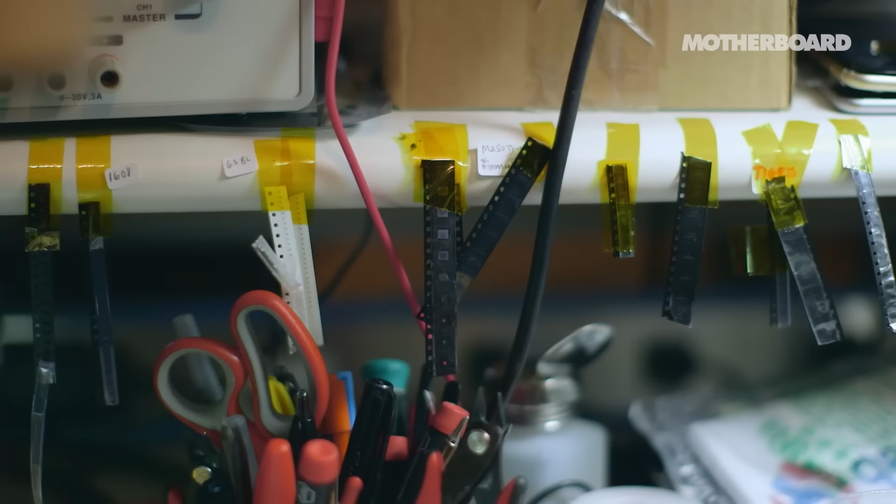Electrical engineers are some of the heroes within the ongoing revolution in mobile devices like smartphones and watches. While much attention has been focused on the user-facing design of smartphones and other contemporary electronics, the internal functioning of these devices is just as important to their ultimate acceptance by organizations and individuals. For instance, their CPUs, networking capabilities, and batteries dictate their look and feel, and all of these components are the work of electrical engineers.

Let's take a look at all of the most recent iPhone designs, the 12, 11, and the X. One of the biggest storylines about these handsets is the distinctive notch, a black bar intruding into an otherwise edge-to-edge OLED screen. Opinions differed on the elegance of its appearance, but its placement was ultimately determined by engineering constraints.

Apple's electrical engineers had to fit many advanced electronics into that notch, including a dot projector, flood illuminator, proximity sensor, and infrared camera. These features work in tandem with the phone's front-facing camera to support the Face ID authentication system, which is an alternative to signing in with a passcode. Due to the total size of all the hardware required for accurately scanning someone's face, the notch reached down into the top center of the OLED display.

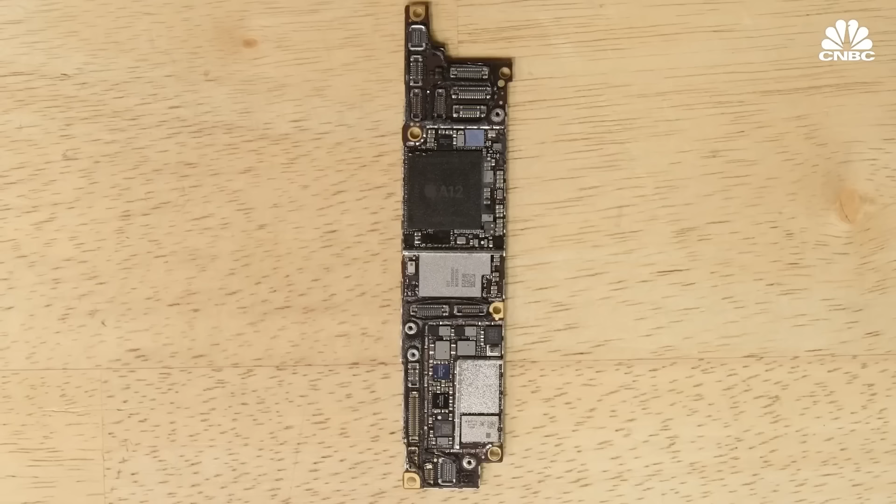High-profile mobile tech like the iPhone is hardly the only domain for electrical engineers working in this category, but it is the highest paying and fastest growing. In each of these fields, electrical engineers operate largely out of the public eye to ensure the efficiency, safety, and cost effectiveness of the numerous essential systems underpinning today's hottest technologies.

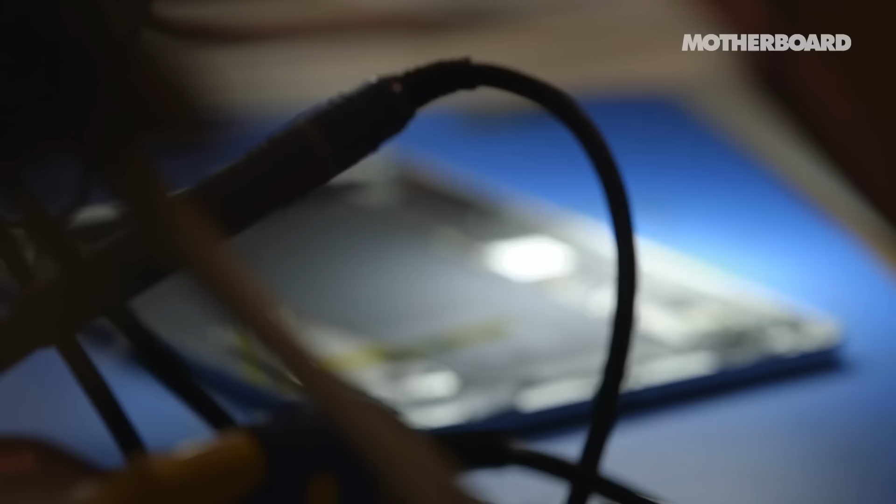Their work doesn't normally catch the public's attention like the iPhone models, but it always makes a difference in how numerous in-demand gadgets and infrastructures actually function. Without question, electrical engineers working on smartphones and smartwatches is an S-tier avenue, guys. If you are interested in electronics at all, this is exactly one of the directions you should consider for your career.

The next job category is energy and power engineering. I got a lot of questions about energy engineering and some about power in the mechanical engineering job tier list video that came out last week. Many engineers consider mechanical versus electrical engineering. I made a video specifically with that title, and if you're interested in seeing the job tier list for mechanical, go check out that video after you watch this one.

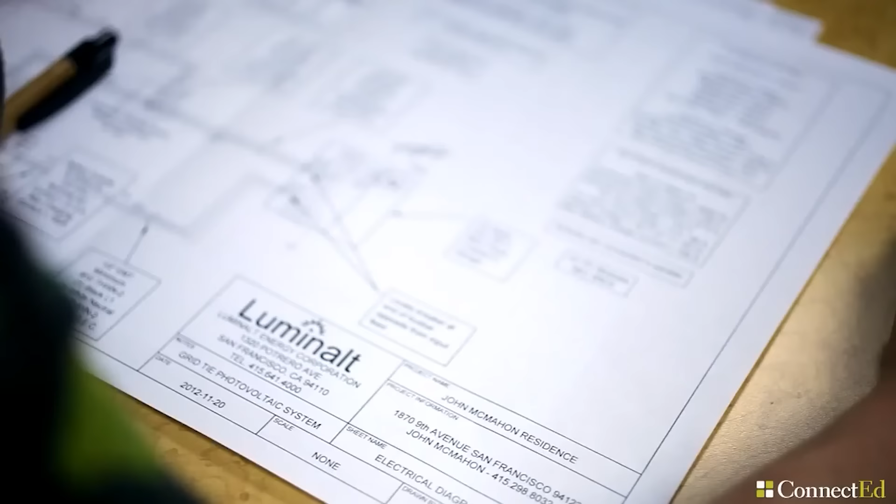Let's first define the differences between energy and power. Energy refers to a variety of resources that can be obtained directly or through processing or conversion. This includes primary energy, which is an energy form found in nature that has not been subjected to any human-engineered conversion process. This includes oil, coal, peat, and shale, natural gas, biofuels and waste, nuclear, hydro, and renewable energy. Hydro was already mentioned, but other renewables include wind, solar, biofuels, and geothermal energy.

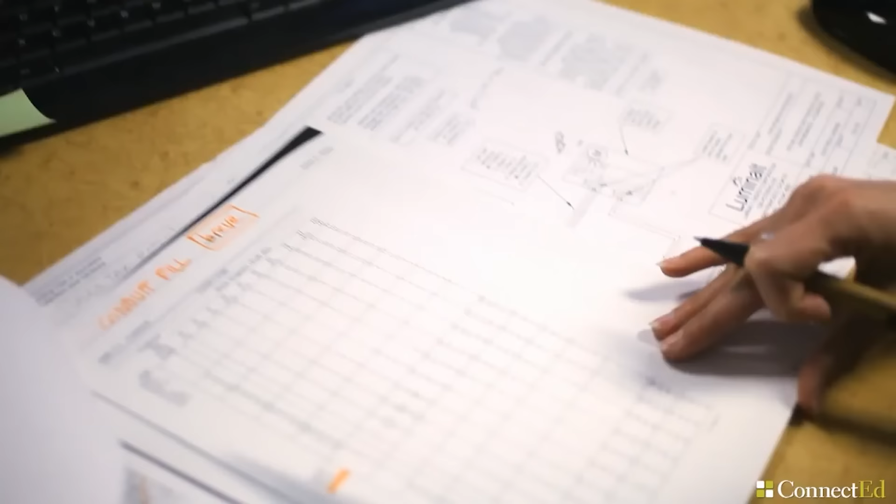Energy engineering is the broader subject of the generation and use of power. It includes energy sources like combustion, nuclear, solar, wind, tides, and how they are used to generate useful work, which can include electrical, but this is only a part of the industry. This also includes environmental matters, thermodynamics, power conversion systems such as motors, turbines, or refrigeration. It will include some study of electrical power distribution systems, but basic circuitry and other similar uses are excluded.

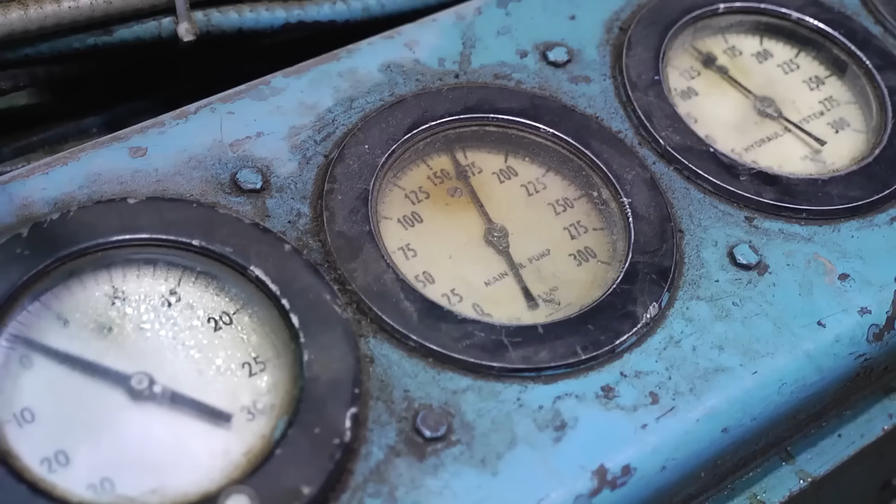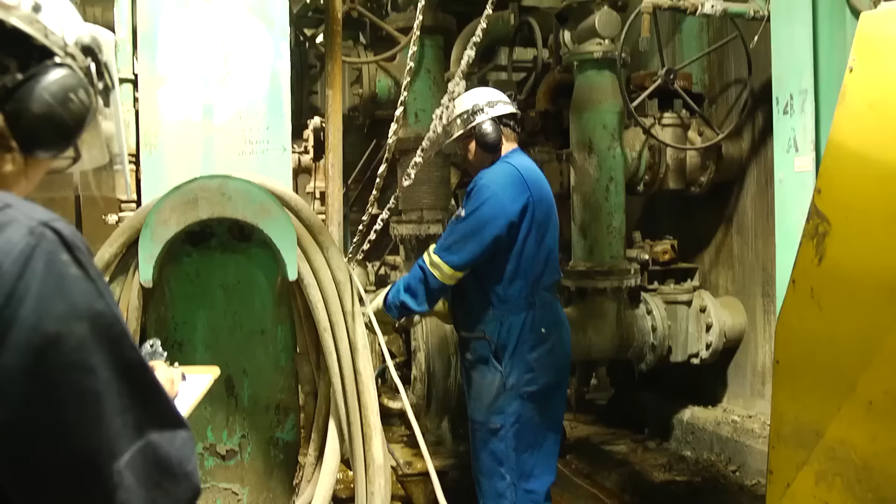Power engineering was one of the oldest and earliest fields that developed within electrical engineering. It deals with generation, transmission, and distribution of electric power, which requires the aforementioned energy aspects. Power engineers also work on a variety of power devices and on power conversion, the process of transforming power from one form into another, such as with electromechanical or electrochemical processes. Many power engineers are part of a large team that builds, maintains, and develops the large networks that connect power generators with users of its power.

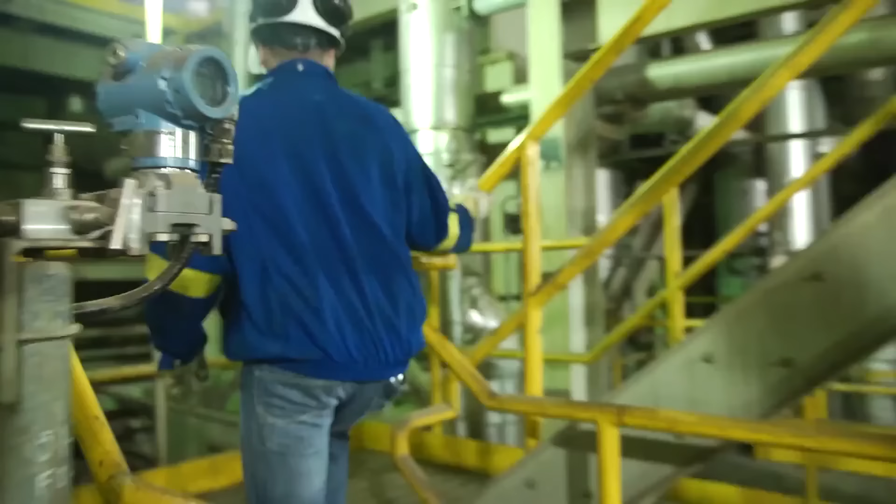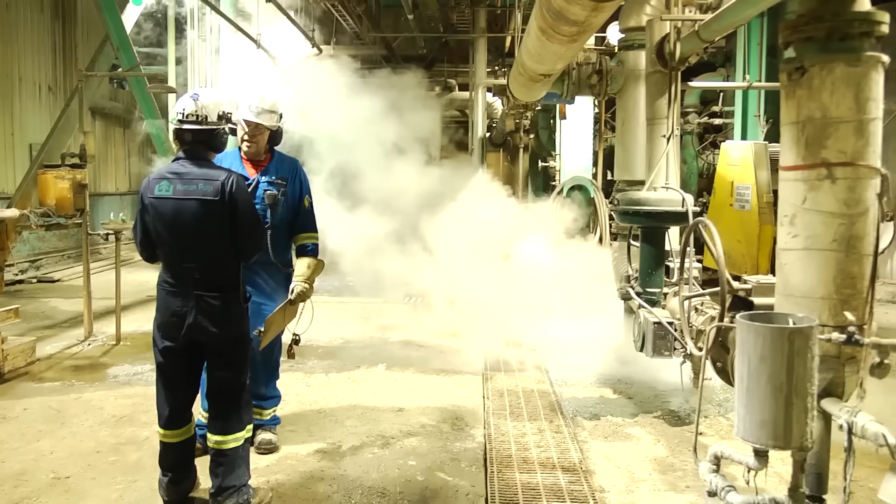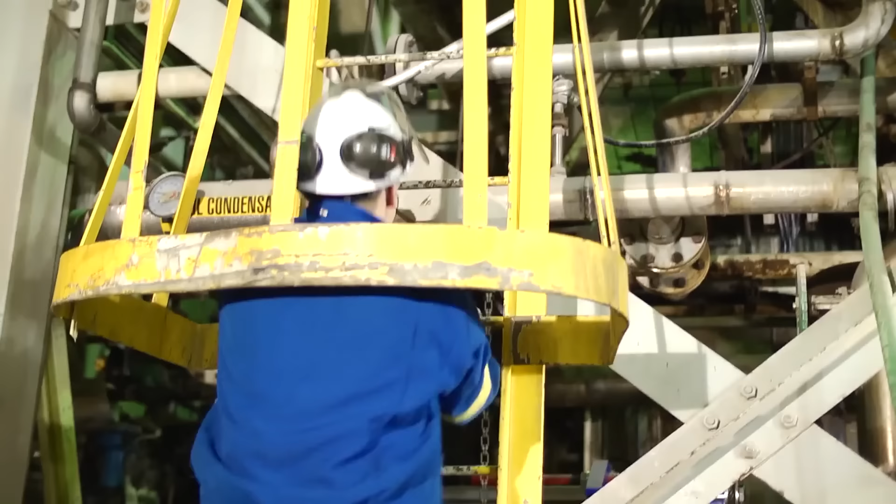This is what they call the power grid. These engineers who work for power utility companies or governments that maintain power grids design components for the grid, architectures for the grid, and devices that either supply power to the grid or draw power from it. Devices that power engineers design and work with include generators, transformers, circuit breakers, and relays and transmission lines. Systems that power engineers work on include electrical substations, which is a subsidiary station of electricity generation, transmission, and distribution systems where voltage is transformed from high to low or the reverse using transformers.

The median salary for energy and power engineers is $130,000, which, let me remind you, sounds much lower than $215,000, but it is 29% higher than the median for overall electrical engineers. It is tied for the 8th highest salary on this top 10 list, so the salary compared to some other things you're going to learn here is not that incredible, but power engineering is a large aspect of overall electrical engineering, particularly if you do not go into electronics, so there are a lot of jobs and a lot of potential in that industry. It's also one of the few areas where electrical engineers may get a professional engineering certification, and for these reasons, this is an A-tier job option.

Okay, third on the list is robotics and automation engineering. I get so many questions about mechatronics and robotics, probably more than any other type of engineering on this channel, and there's some things here that you are going to be surprised by, but either way, it's coming in at the third mentioned job category on this list.

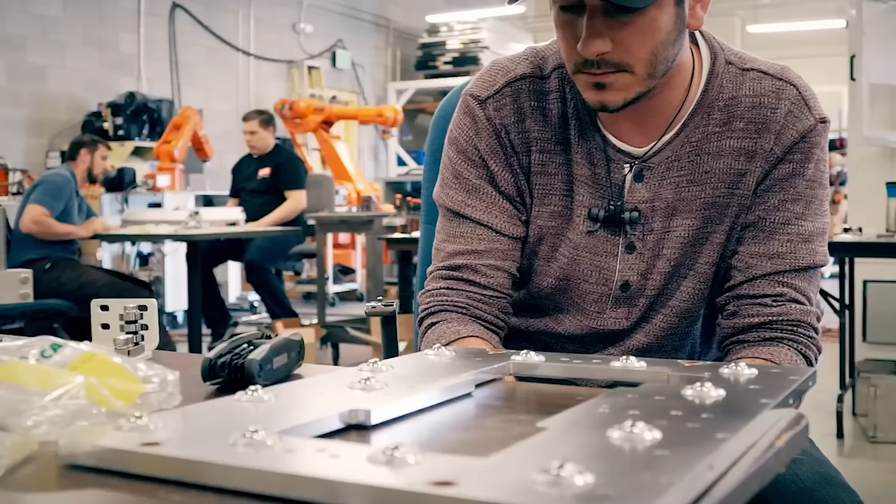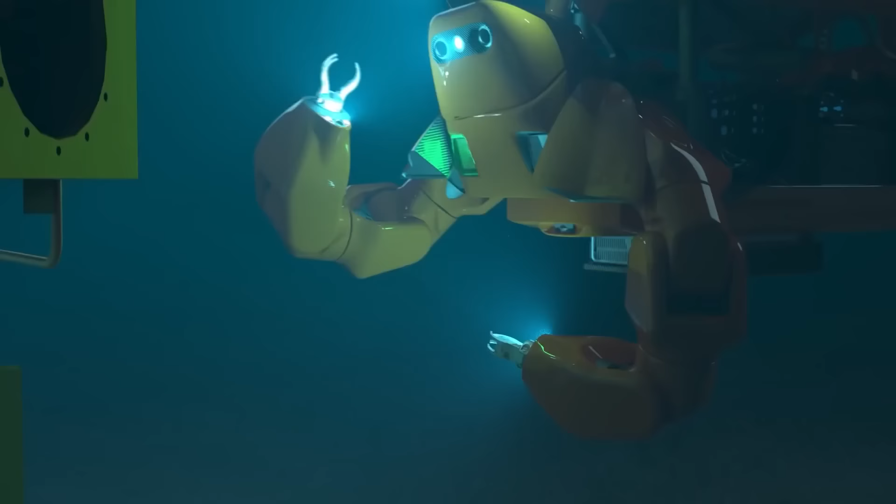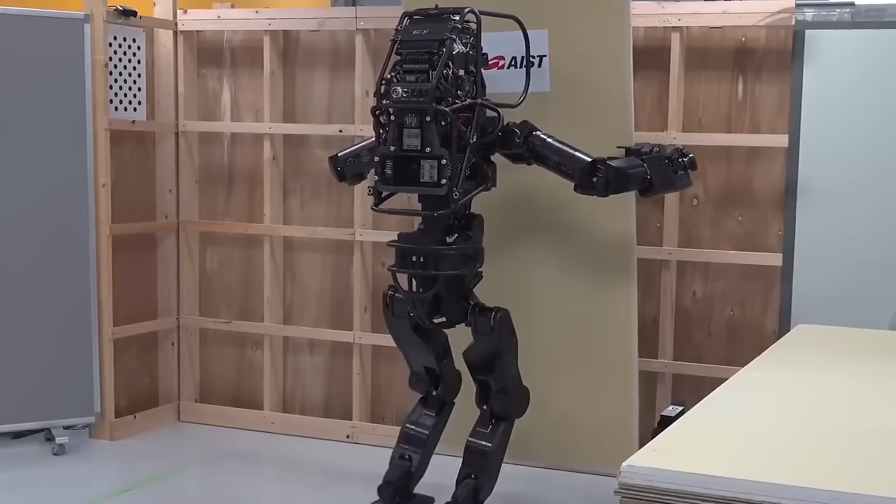Robotics is a multidisciplinary field which brings together a number of distinct branches of engineering, including mechanical, electronic, computer, and systems engineering, to support a vast number of industries, including mining, manufacturing, automotive, industrial services, and more. This field of engineering is centered on building machines that replicate human actions. While the manufacturing industry is an important one, robotics can also be leveraged in industries as diverse as aerospace, transportation, automotive, medicine, and everything in between. As a result, robotics engineers can be responsible for performing a wide range of duties related to those discrete branches of engineering, all depending on the organization they work for and the industry that it operates within.

Robotics engineers have a broad range of responsibilities.

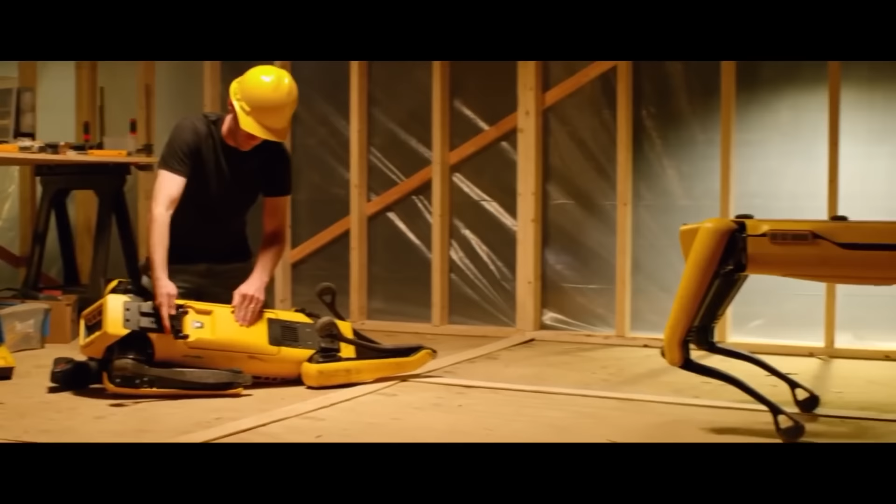That's why most robotics engineers need to be able to step in and respond to any of the needs of a company that may hire them, whether it be designing, installing, programming, teaching, or maintaining robots and automation systems.

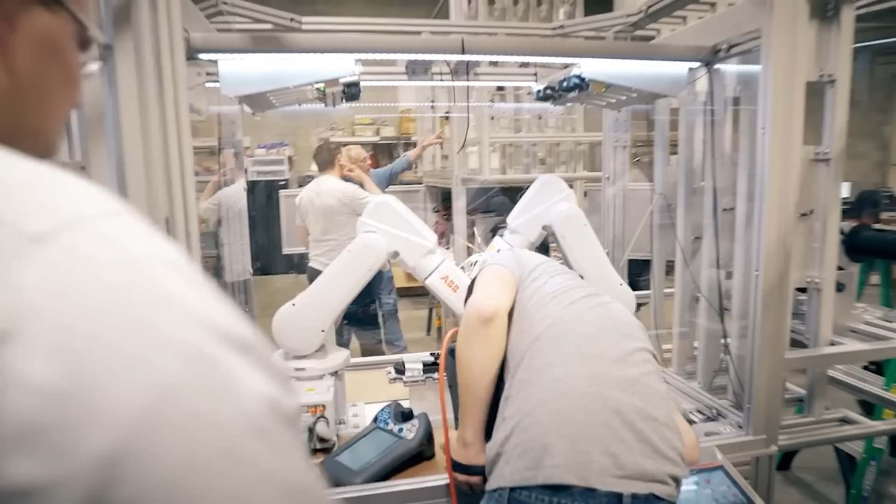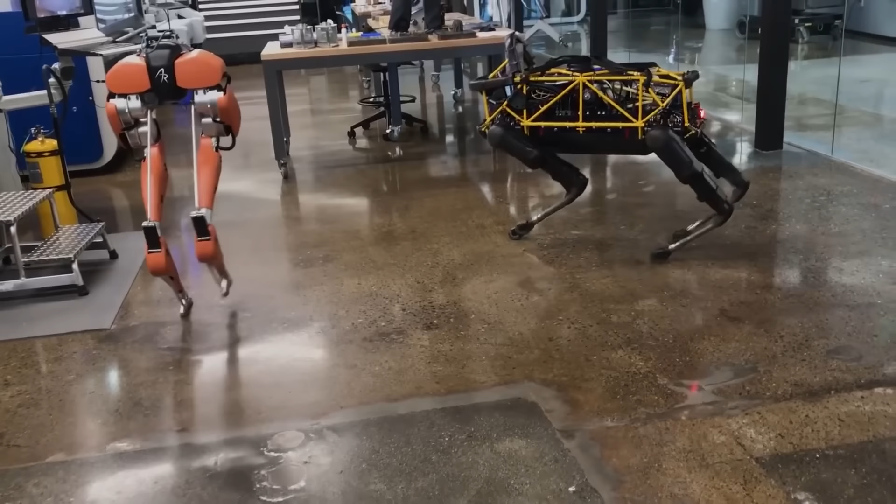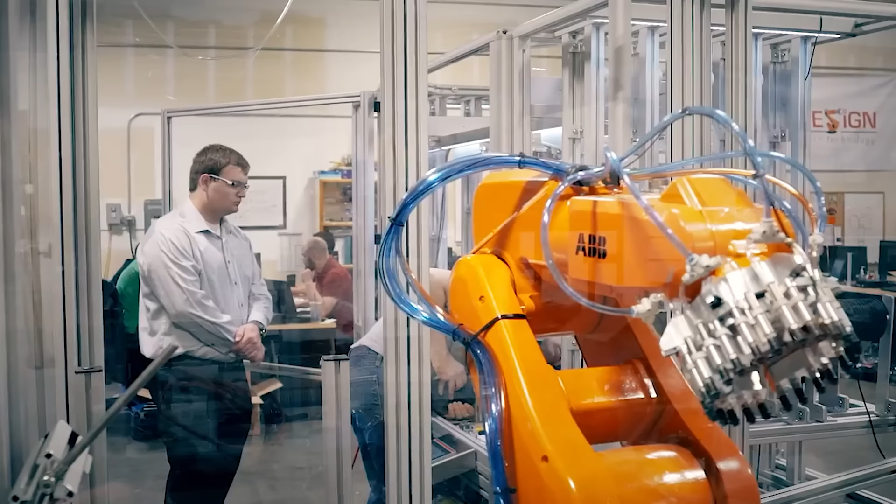There's a list of duties that robotics engineers may be capable of, including conducting research to determine the parameters of a robotic application, designing robotic systems from start to finish, developing and implementing software that will control the robots, creating prototypes and working on necessary components like microprocessors, developing cost-effective and efficient processes to produce the machines. They may perform integration tests and quality control, apply machine learning techniques, create complete documentation for the systems, monitor the use of the systems, troubleshoot defects, and update systems as advancements are created.

I was shocked to see that robotics and automation engineers are also tied for 8th on this list in salary with a median of just $130,000, which again sounds good, but it is almost at the bottom of this list.

I didn't have the heart to give it A tier because it's one of the coolest types of electronics engineering, and so many people want to go into that avenue. I think it is the future. I think it's going to increase over time.

I think there is not a consumer-facing type of robotics industry yet. You can't go out and just buy a robot that just kind of works by itself, besides a Roomba and a couple other similar things. That's why things like the smartphone industry make so much money, because there's so many people buying smartphones.

So I had a hard time putting this in A tier, so I gave it a combination of A/S tier for robotics and automation engineering.

The fourth job category on this list is non-internet software developers. You guys might be confused, like, what do you mean non-internet software developers? But listen up. Since there is so much programming in electrical engineering, many EE graduates move into some sort of software development career or role after graduation.

Software developers are the creative brainstorming masterminds behind computer programs of all sorts. While some software developers may focus on a specific program or app, others create giant networks or underlying systems that help trigger and power other programs. This is why there are two main classifications of developers: applications software developers and systems software developers.

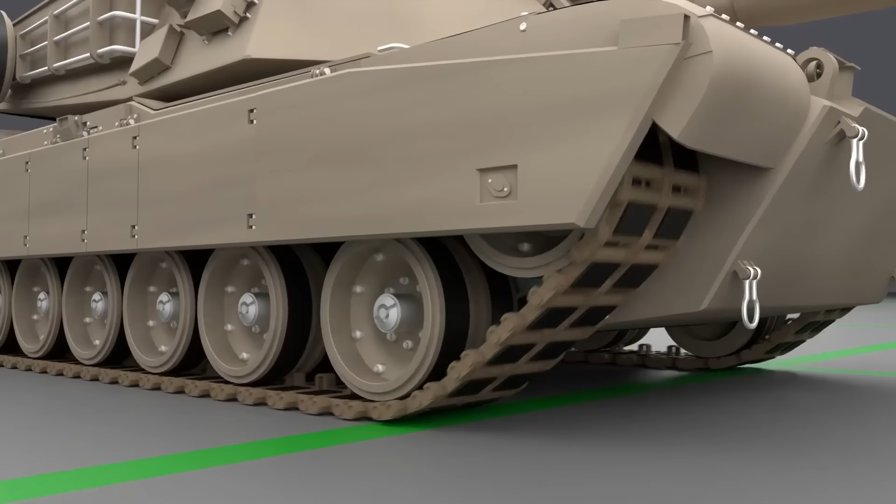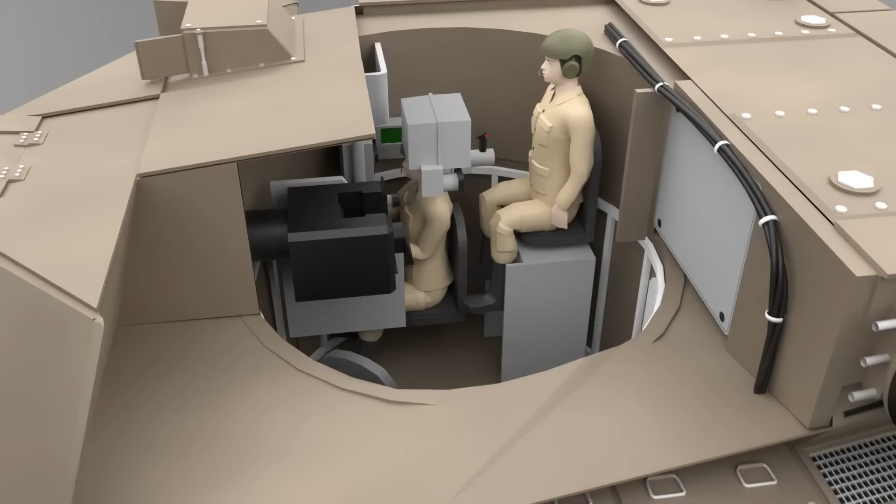For this job category, another super cool job example I have for you is my friend who works as a civilian computer electrical engineer for the military. He works with the black boxes in tanks and military vehicles and things like the tracking systems between the laser guided target and the gun turret and the accuracy of whether it can keep up with the target or not.

Some of these types of jobs are super cool and some of these are not as cool. The median salary for this type of job is $151,000 a year, so about 50% higher than the median of all electrical engineers.

Pretty good, but I know people who are software developers at IBM and some of these banks, and they do not enjoy their job as much because it's big corporate and bottom line focused, and they may not even be able to talk about what they work on with their friends and family.

So with the fifth largest salary on this list, I have trouble putting it all the way in B tier, but it's not sexy enough to put in A tier, so it's actually going to get A/B tier for non-internet based software developer jobs for electrical engineers.

Okay, job category number 5. This is one of my favorite for sure, which is a machine learning engineer.

In 2019, the career platform Indeed conducted a study, and they identified that machine learning engineer was the fastest growing job title for all jobs in the world. And they said it was likely to last into the future.

Machine learning is a branch of artificial intelligence where a class of data-driven algorithms enables software applications to become highly accurate in predicting outcomes without any need for explicit programming. The basic premise is to develop algorithms that can receive input data and leverage statistical models to predict an outcome while updating outputs as new data becomes available. The processes involved have a lot in common with predictive modeling and data mining, because both approaches demand searching through the data to identify patterns and adjust the program accordingly.

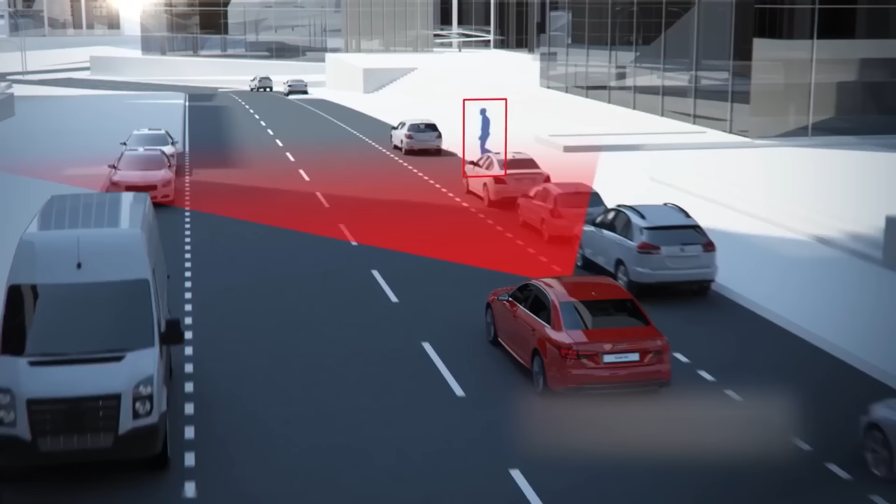Machine learning engineers also build programs that control computers and robots. The algorithms they develop enable a machine to identify patterns in its own programming data and teach itself to understand commands and even think for itself.

Most of us have experienced machine learning in our day-to-day lives in one form or another. Want some examples? Sure you do. Things like the recommendation engines on Netflix, right here on YouTube, and even shopping on platforms like Amazon. Self-driving cars, virtual assistants like Siri and Alexa, commuting predictions like your GPS navigation, gamified learning like on Duolingo, online fraud detection, connected smart homes like the Nest application, predictive healthcare like Kinsa that alerts you before you're getting sick and the symptoms arise, and even things like determining your credit worthiness.

This is a super awesome job category, and if you're interested at all in data science or artificial intelligence, this is the number 2 salary on this list, and it is $185,000 a year, which is 84% higher than the median salary for all electrical engineers. This is certainly an S tier job category and most likely my favorite career trajectory for electrical engineers in general. Machine learning is one of the ways to go, guys.

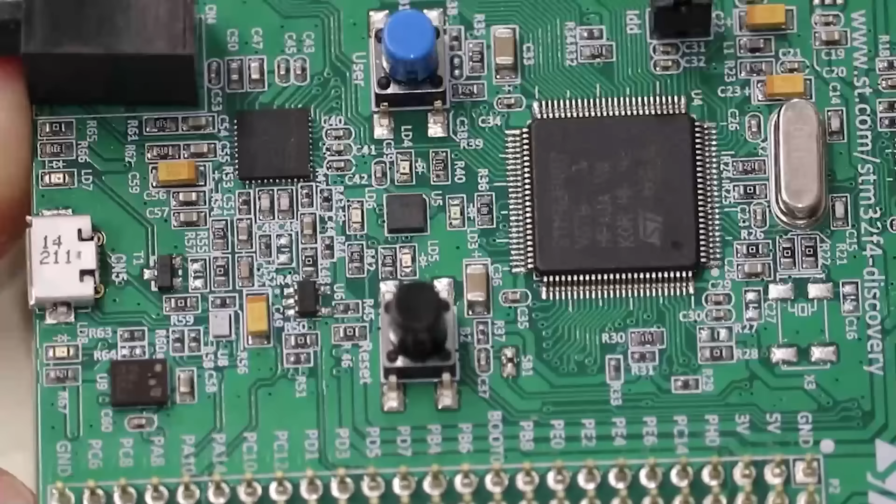Okay, halfway through. Number 6 next up on this list is circuits and devices engineering. The world will be full of electronic devices for a long time, and circuit design engineers will help create and test out the unique types of circuits that allow them to function. Electronics courses will teach you to work in circuitry and control systems, among other electronics components. A circuit design engineer develops circuitry found in devices such as a computer, smartphone, or television.

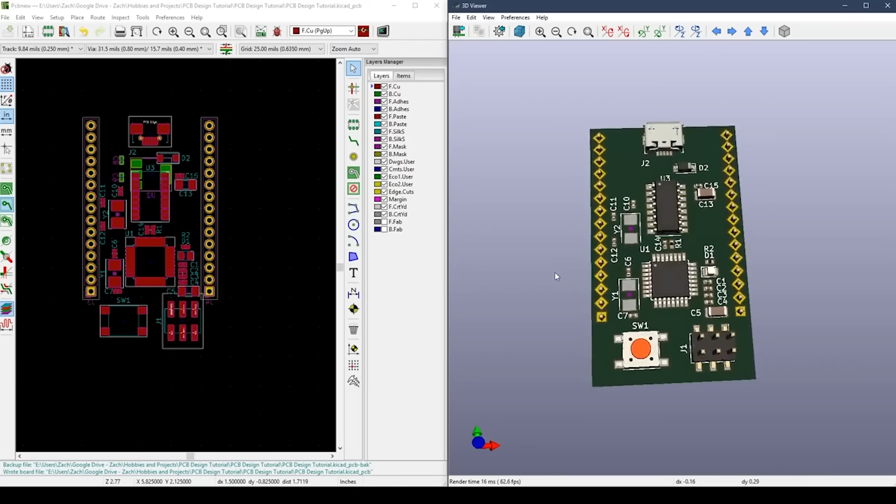As a circuit design engineer, your job duties include designing the latest advances in circuits, developing circuit equipment, and troubleshooting after installation. You may also supervise the manufacturing process in plants and factories, as well as perform safety and cost assessments. Circuit design engineers are given certain specifications regarding a product or project, which are used as a guideline for designing circuits and circuit boards. Designers are sometimes given conceptual designs that they can turn into real-life working circuits.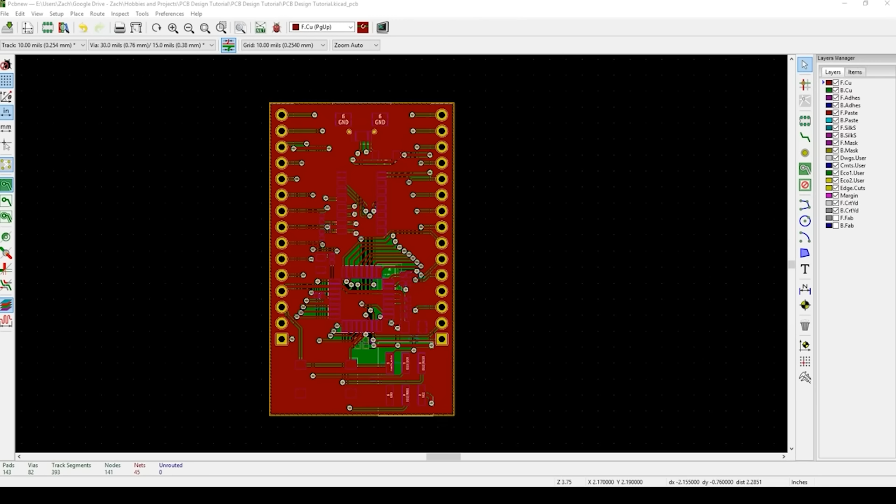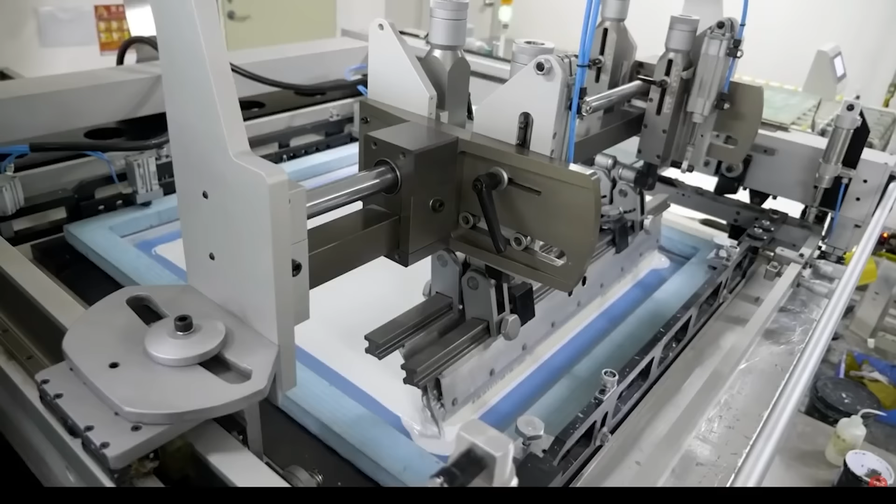Other responsibilities may include designing different types of circuits and boards, such as amplifiers and multi-chip modules. Circuit designers create signal processing filters, which extract information from electrical currents and voltages. They must work to meet deadlines, achieve quality goals, and stay within budgets. During the design process, circuit designers perform laboratory tests using equipment such as a network analyzer, spectrum analyzer, or a power meter. They often simulate circuits using Spectre RF and Sonnet. They provide direction to layout technicians regarding circuit implementation through electronic design automation software, and are responsible for the entire design process from conception to the finished unit.

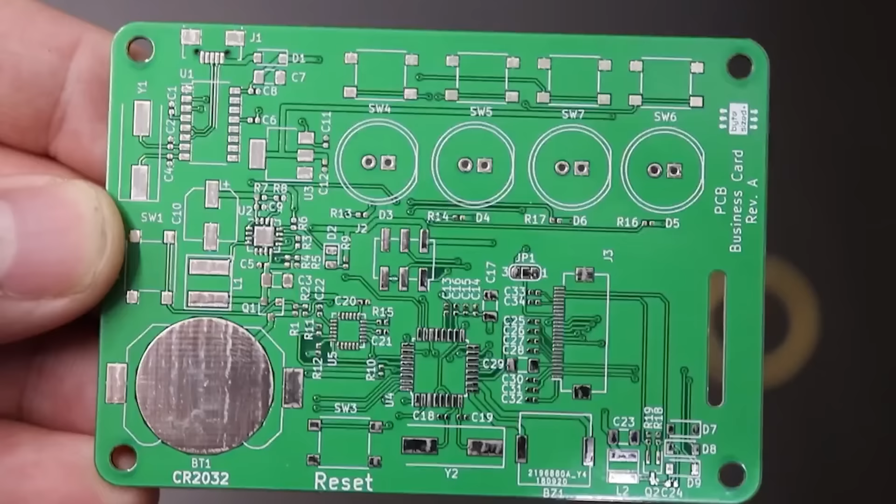This is most likely the purest type of electronics engineering on this list. You could end up in mechatronics, you could end up working with computer systems, you can end up working anywhere that circuits exist, which is all electronics.

Circuits and devices engineers come in at 4th on this list with a median salary of just under $158,000. Because it's pretty close to the middle on the salary list and it's broad, flexible, and you can go anywhere in your career, this is an A tier type of job option for electrical engineers. Circuits and devices engineering.

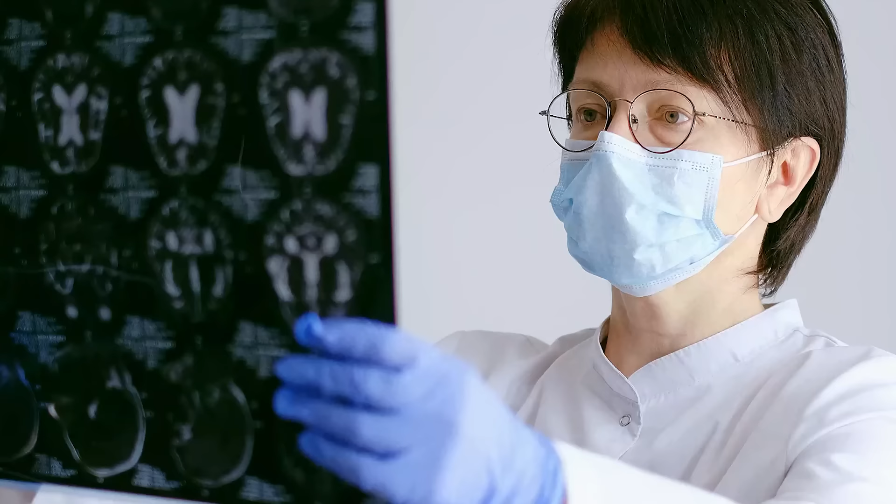Instead of saying electromagnetics over and over again, I might just say EM. EM is the study of underlying laws that govern the manipulation of electricity and magnetism and how we use these laws to our advantage. Hence, electromagnetics is the source of fundamental principles behind many branches of electrical engineering and indirectly impacts many other branches. For example, laws in circuit theory can be derived from laws of EM.

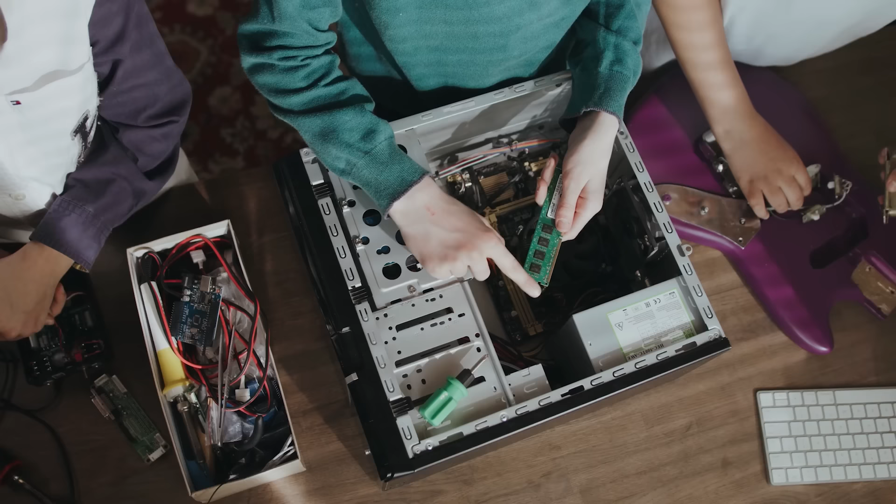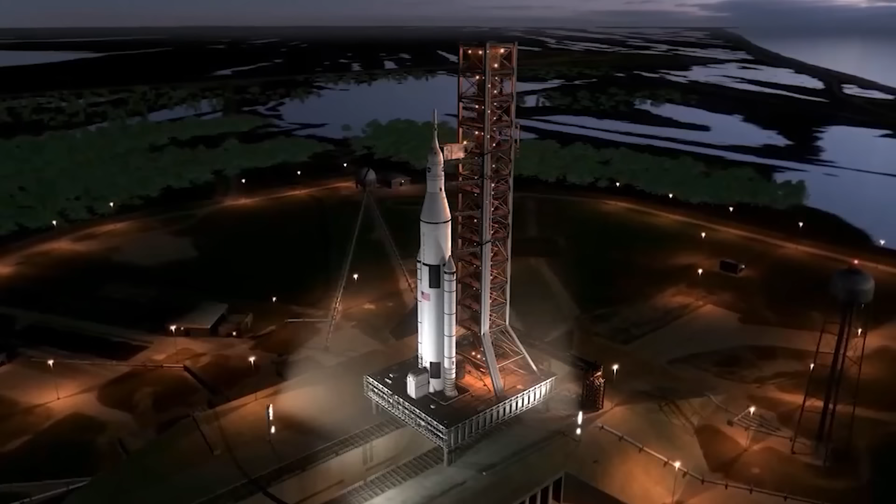The increased clock rates of computers make the electrical signals in computer circuits and chips more electromagnetic in nature, meaning that mastering their manipulation requires a fundamental understanding of EM. EM includes the study of antennas, wireless communication systems, and radar technologies. In turn, these technologies are supported by microwave engineering, which is an important branch of electromagnetics. The use of laws of EM can also extend into the realms of remote sensing, subsurface sensing, optics, power systems, and many other branches of electrical engineering.

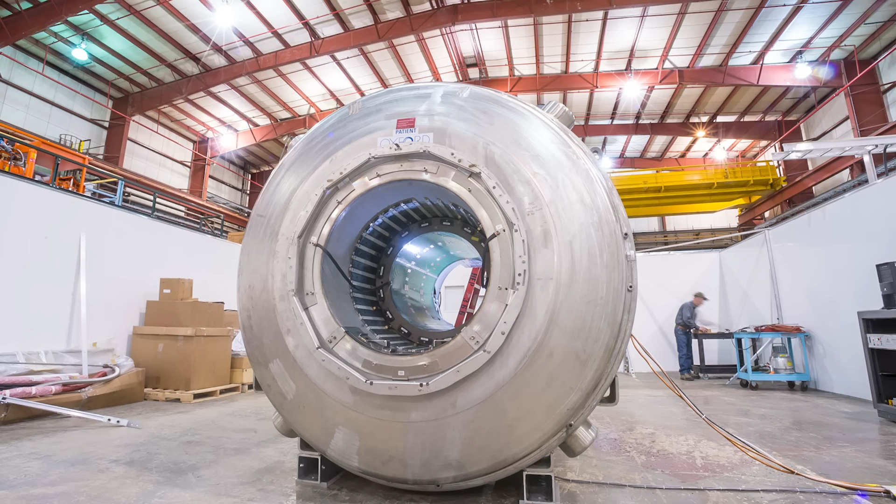Electromagnetic engineers design and develop electromagnetic systems, devices, and components, such as electromagnets in loudspeakers, electromagnetic locks, superconducting magnets in MRIs, and magnets in electric motors. Electromagnetics also produces radiation, which is why this category is called EM and radiation.

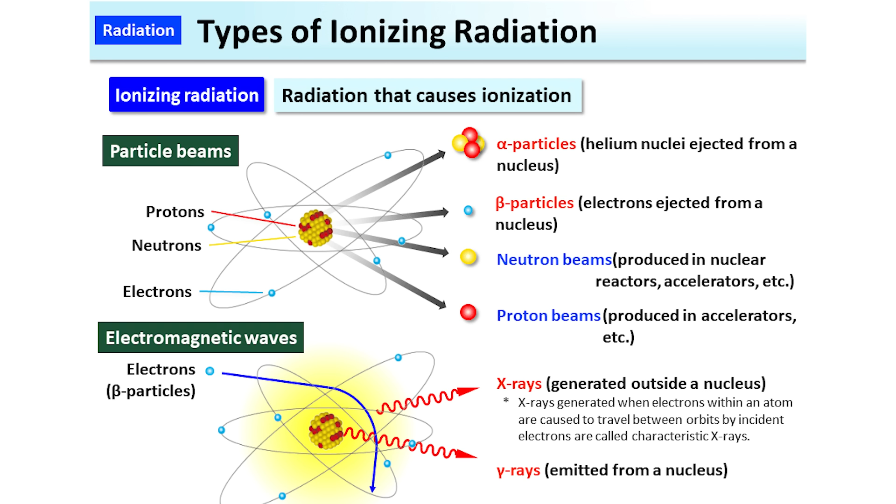There are 2 types of radiation, and one of these you may never have heard of before. The first type of radiation is known as particulate radiation, which consists of actual subatomic particles being emitted from the nucleus of an atom. The second type is called electromagnetic radiation. This type of radiation, in simple terms, is energy in waveform that possesses both electrical and magnetic characteristics.

If you look through electromagnetic radiation jobs, they are almost all in the aerospace sector, Northrop Grumman, Boeing, and other service providers of the astronautics and aeronautics industries. The median salary is $141,000, and because it's just so niche and there are not as many jobs, I have to put this in B tier.

Okay, coming in at 8th on this list is communications technology engineering. There's a whole bunch of avenues for communications and technology, but for the sake of this, we're going to talk about telecommunication engineering here. The telecommunications industry is the backbone of today's mobile landscape, deploying voice, data, graphics, and video at ever-increasing speeds in a growing number of ways.

Wireline telephone communications was once the primary service of the industry, but wireless communication and satellite distribution are becoming increasingly dominant. Specialists in telecommunications engineering are needed to keep up with this ever-changing, fast-paced industry.

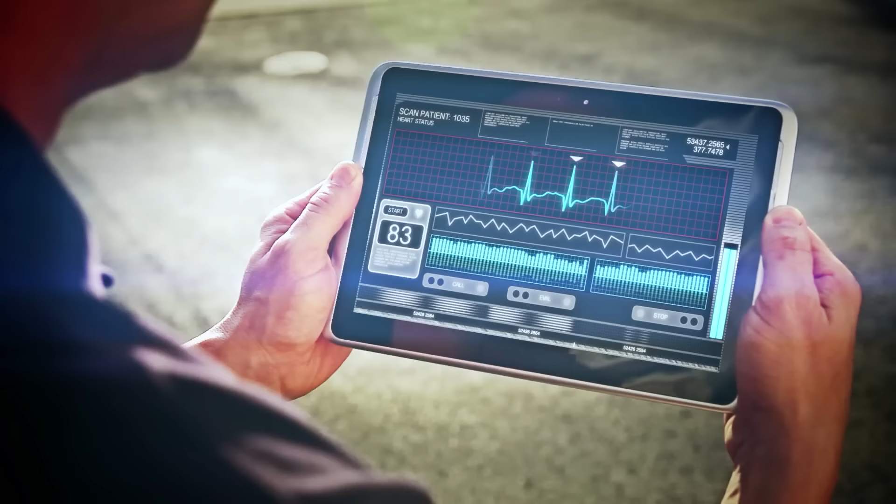Telecommunications engineering is a discipline founded around the exchange of information across channels via wired or wireless means. It brings together all of the elements of electrical engineering, including computer engineering and system engineering, to create and improve telecommunications systems. Telecom engineers work to develop, design, and maintain voice and data communication systems, which include fiber, satellite, wired, and wireless, as well as the encoding, encryption, and compression of data.

Put simply, telecommunication engineering can be found in just about every aspect of our lives, from GPS navigation to the internet. Some of the main areas of focus for telecommunications engineers are the installation of high-speed broadband computer networks and optical and wireless or satellite communications.

To give a better idea of the scope of work a telecom engineer operates within, here are some career opportunities for individuals working within this discipline: computer communications and networking, mobile communications, voice and data networks, TV and radio broadcasting, optical networking, remote sensing, measurement and control, and next generation networks.

Communication technology engineers are third on this list for salary at $161,000 a year. It is an industry that is never going to go away. It's going to continue to change and evolve with a high salary, a fun industry, a lot of jobs, and a great future outlook. This is another S-tier job option for electrical engineers.

Okay, 9th on the list is internet web developer and applications engineers. For simplicity, we're going to call this application software development or just application development. We have already heard about system software development, which is the other half of software engineering or software development. Those types of engineers work in enterprises where their work is internal to that company and regular internet users or consumers will never see the programming.

Computer application software engineers help to design, program, test, maintain, and repair computer applications for businesses, private consumers, and internet users. Most computer application software engineers have a bachelor's degree in computer science or electrical or computer engineering who lean into the computer science side of the major. Application software engineers design and develop software applications such as utility programs and general application software. They work with the user to determine needs and create software to meet users' needs. They modify existing software to fix problems, optimize functioning, and enable its use on new hardware platforms.

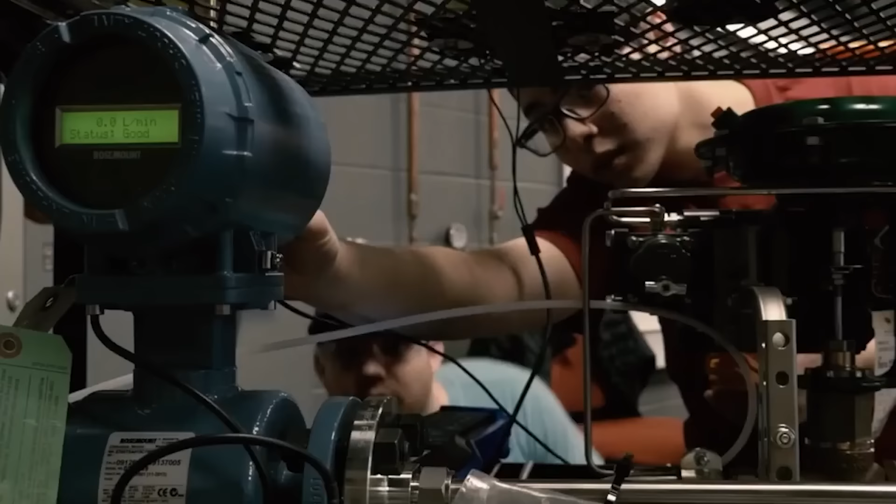Okay, last but not least, guys, is instrumentation and measurement engineers. Instrumentation engineering focuses on control processes that use sensors as an input. This field of engineering can be concerned with equipment processes using sensors to observe many types of variables, including pressure, pH, voltage, temperature, and many more.

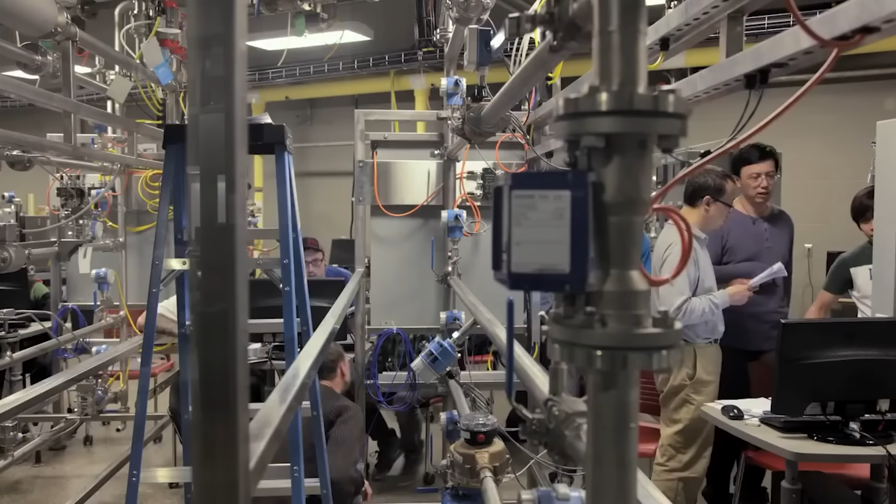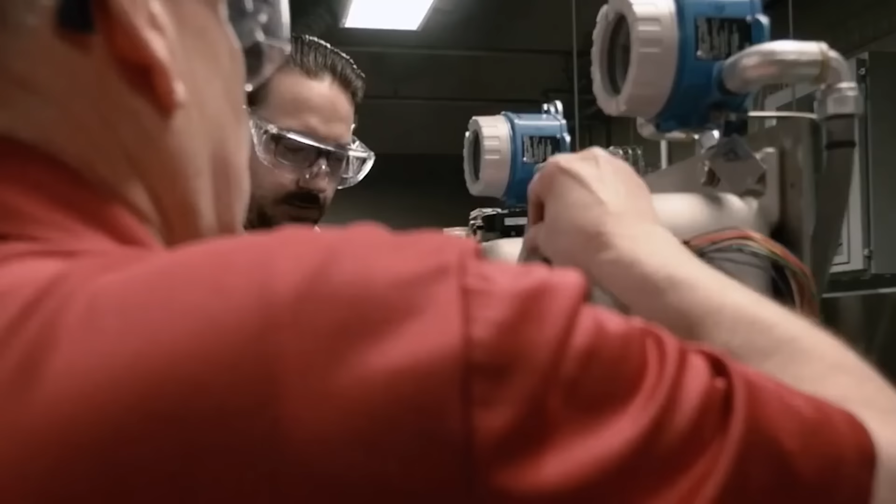Feedback from such sensors can be used throughout the manufacturing process. They can measure and monitor things such as specific machine outputs, the efficiency of systems, and most importantly, safety parameters. They can also play an incredibly important role in the monitoring and recording of quality data to ensure the safety and reliability of the final product.

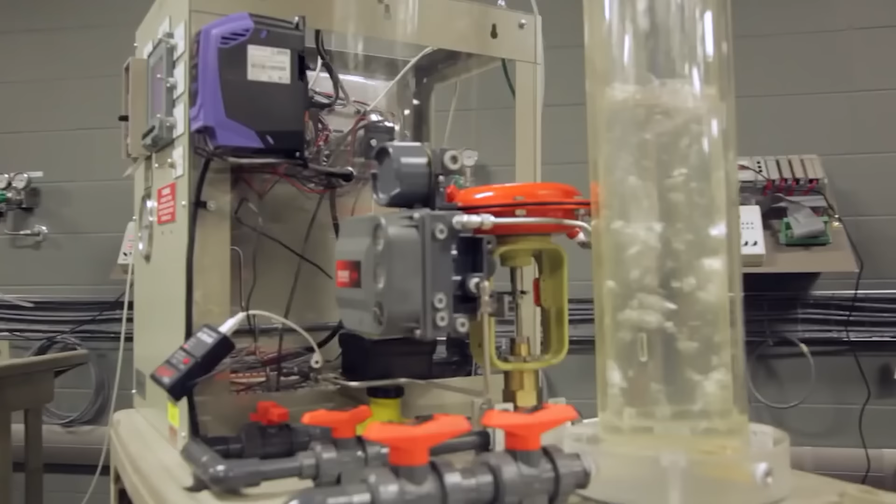In addition to simply monitoring, the feedback given from these systems and processes can be fed back into the system to alter and control the manufacturing process, optimizing efficiency and safety. The ultimate aim of instrumentation engineering is to ensure that control machinery and processes are working to achieve maximum productivity in an optimally efficient, safe, and reliable manner.

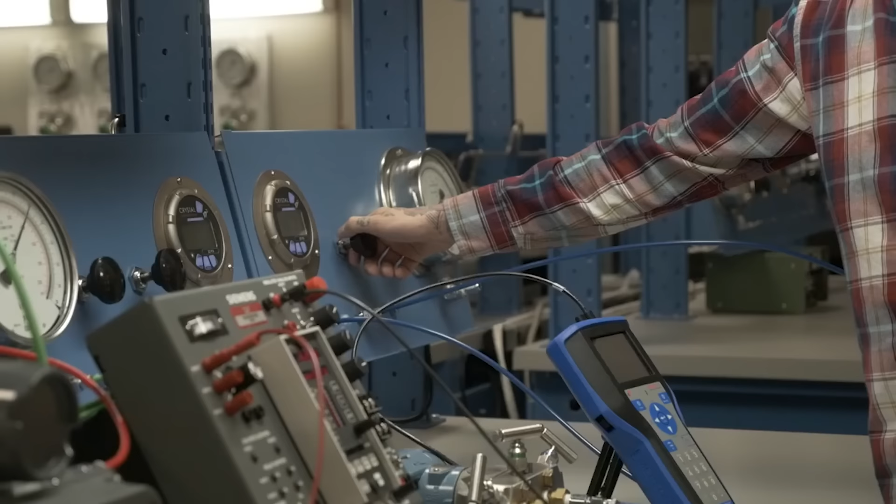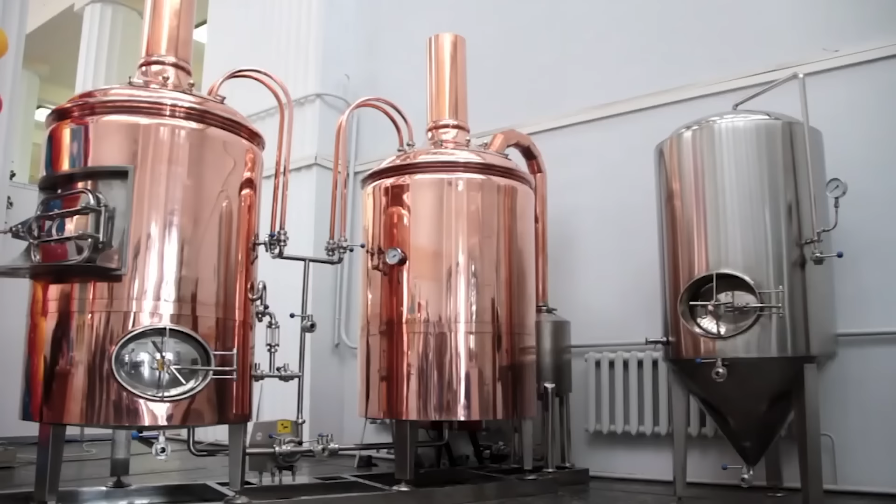Instrumentation engineers are responsible for planning, installing, monitoring, and maintaining control systems and machinery within manufacturing environments. They typically work with control processes that use sensors to provide feedback. As a result, they can also have a role in designing and developing consumer products that utilize such processes, such as blood glucose meters or smoke detectors.

This engineering career avenue, even though it is 24% above median salary, is actually last on this list at $125,000 salary. After I read a bunch of job descriptions, it doesn't seem like it is that thrilling of an avenue. Yes, if you're in love with it, you can have a great career, but because the salary isn't as high on this list, and you already heard about how interesting it is, this is a B tier job option.